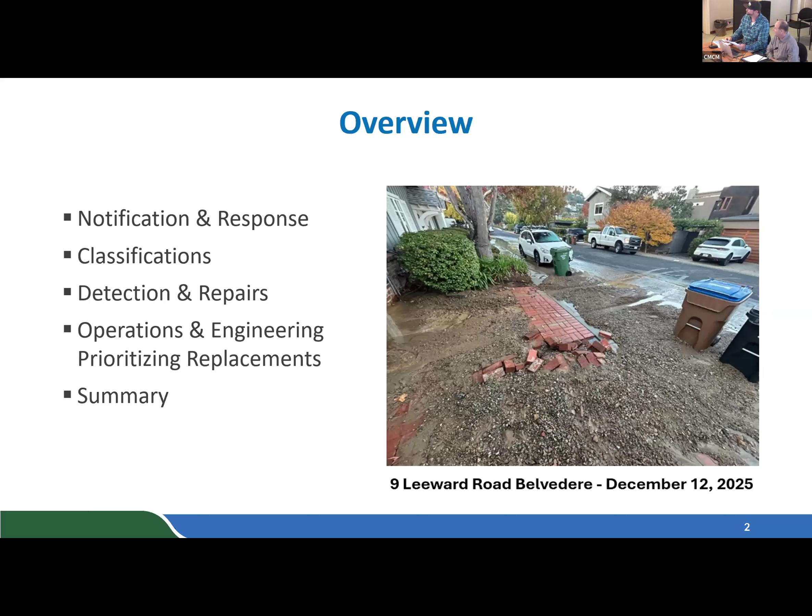At least we didn't get the BMW wiped out with the rocks this time.

So some key considerations for water main breaks: impacts extend beyond repairs and include customer outages, property damage, and environmental risk to aquatic life from discharges. Key points include outage extent and duration — some water main breaks may extend for a long time, affecting customers' water use. Some system impacts could affect district-owned pumps and tanks. For multiple customers, some of the larger jobs, believe it or not, may have a big impact — they may only be 1 or 2 service laterals affected, but there could be hundreds affected depending on where it's at in the system.

Property damage potential includes both residential and business. It could be privately owned property where water gets into a garage and affects storage boxes of personal property. It could also cause flooding in homes, atriums, and entryways. The other key point here is chlorinated discharge impacts to nearby aquatic life.

So, direct discharges. Some of these main breaks, as you see the one on the previous slide from Leeward in Belvedere, there was obviously a significant amount of water that traveled down the street. That can have an immediate impact if there's a nearby waterway.

Is this at that same house? This is not, this is over here on Old Quarry Road. This was a sheared off fire hydrant. Yeah, that's what it looks like.

So, even these can have extensive chlorinated impact if there's a nearby waterway.

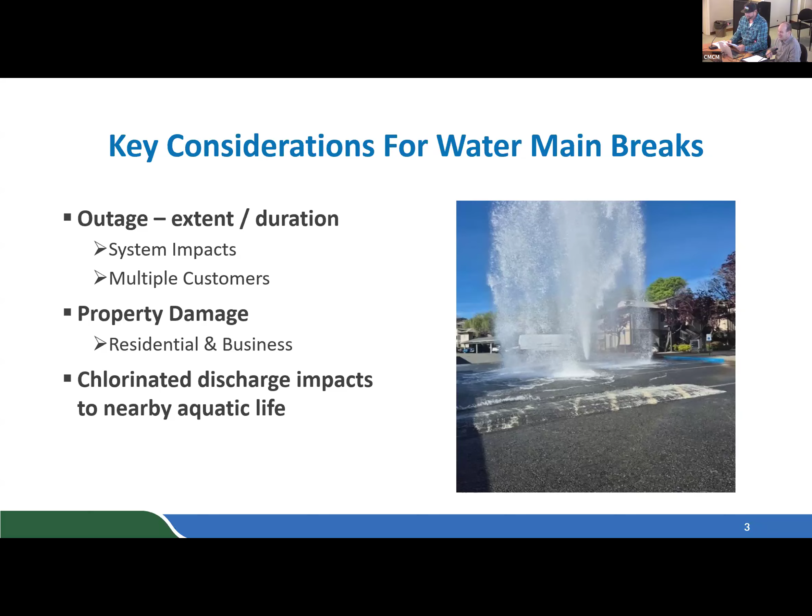So here we have notification and response. You have water main breaks reported by the public, first and foremost. They are our eyes and ears out there, they see stuff day to day. So they're usually our main reporter of water main breaks or street leaks or leaks that they need us to go take a look at.

You also have emergency services, be it the fire department, police department, or other utility companies. You also have SCADA alarms - supervisory control and data acquisition - where we can see rate of change alarms for storage capacities in the tanks. We can also see flow problems such as suction or discharge, input and output from pumps as we're moving water along the system. Usually when we get an alert, we want to get somebody out there in the field to take a look at it.

We do have 24/7 distribution operators working in operations. When a leak is reported or a potential main break is reported, they'll notify one of 5 utility system specialists here at the district, who are 24/7 first responders. This could be during normal business hours, 6:30 to 3, or after hours, middle of the night, weekends, or holidays. The utility system specialists will then go out to the field, report on that location, and report their findings.

It's important to note, and I'll note it again later, that not all leaks that get reported are district leaks. A lot of the time it's consumer leaks, particularly this time of year when we see a lot of broken irrigation as it starts to heat up. From there, the utility system specialist will report their findings and classify the leak to the distribution operator. We'll get into leak classifications later in this presentation and how they're defined and responded to.

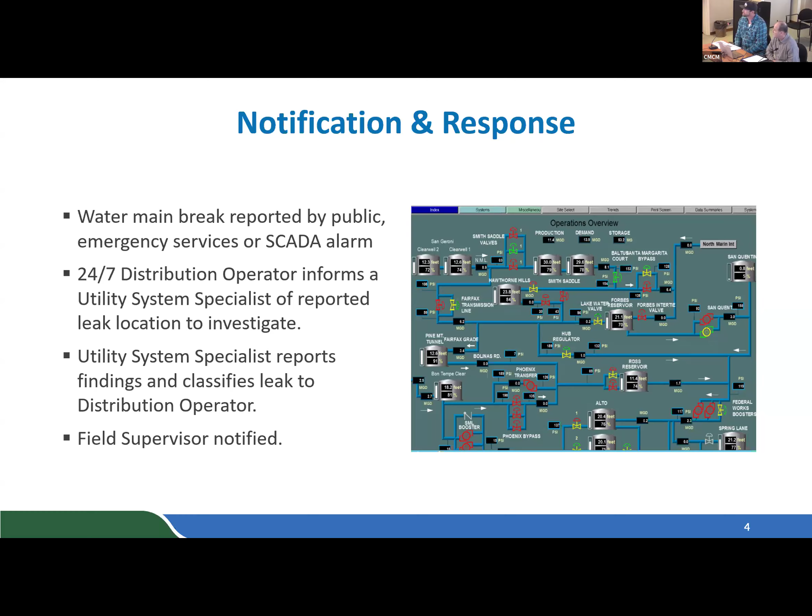So here you kind of see a response chain. We'll get into the first 3 right away. The leak gets reported to the distribution system operator, to the water district. The utility systems specialist responds to the site, and the distribution operator or supervisor is notified of the findings.

Now, if it's a consumer leak and doesn't have anything to do with the district's infrastructure, the communication stops at the distribution operator. They report their findings: we have a leak at this address, it's a consumer leak, I met with the homeowner or business owner and told them of the fact.

If it is a district leak, from there, the supervisor will then get notified of the findings. The job will get scheduled and repairs will be made. The image on the right shows one of 5 utility system specialist vehicles responding to a scene, securing the scene with cones, lights, and their available equipment.

And they all carry dechlor? Yes. I'm really not asking these questions for me - I'm asking for the board so that they kind of understand a little more about what we do.

Yeah, it's important to also note on that previous slide, this slide shows that every reported leak triggers a defined chain of actions that moves efficiently from detection to repair.

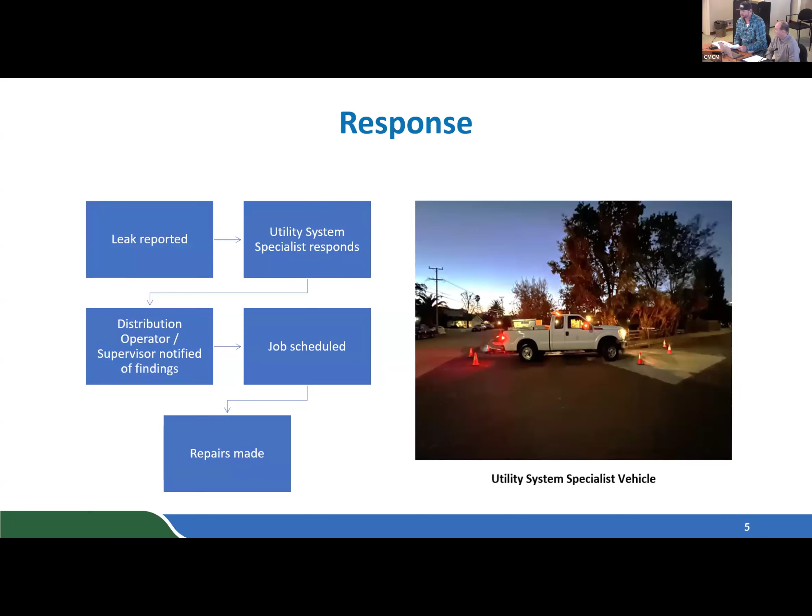This next slide shows utility system specialist and distribution operator response, and the response between the two classifications. What this slide shows is a clear division of responsibilities and communication that is critical to minimize impacts, environmental risks, and liability during water main breaks.

On the left-hand side you'll see the utility system specialist defined roles. They will identify the leak based on the call from the distribution operator, whether it be a class 1, class 2, class 3 leak—we'll get into those classifications later in the presentation—

or whether it be a consumer leak where they need to report their findings. Their job first and foremost is to secure the leak location. If it is a district water main break, we've got to secure the location first from the public and from other vehicle traffic, and make the scene safe. That's first and foremost, and ensure it remains safe.

We'll also put out best management practices, BMPs as we call them. That's a silt mitigation and dechlorination process where we try to dechlorinate the water and mitigate the amount of silt that could get into a waterway, like a storm drain. We'll get into those again later on—there's a particular slide that displays that.

Documentation, photos, and written notes. We all have cell phones—utility system specialists have their cell phones, and everybody takes pictures nowadays. So we take pictures upon reporting to the scene, during the duration of the work, and of the repairs made. So we have all the documentation we need, along with written notes regarding the progression of the job. All that comes into play when the work order gets created by the supervisor for documentation purposes and potential claims. We'll get into that here in a minute.

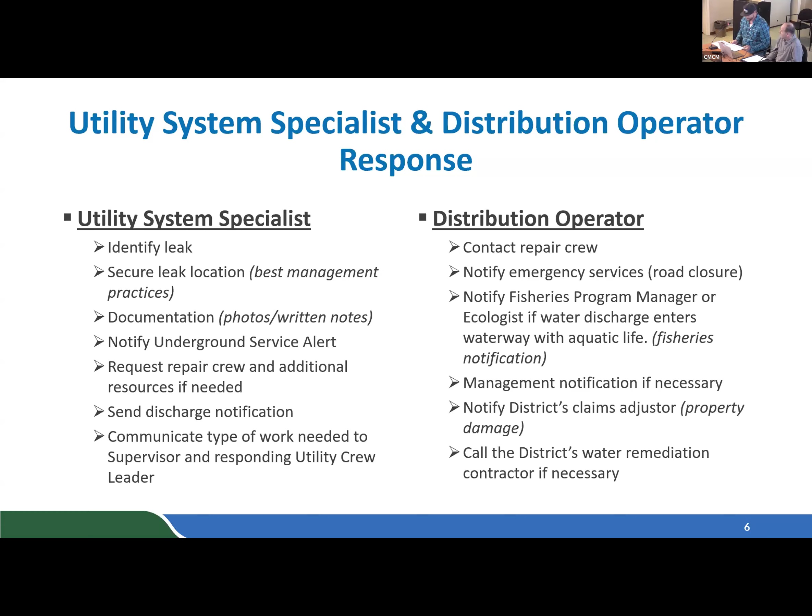This next slide shows the supervisor's response. The supervisor, upon notification, will assign the resources. Again, the resources could include a typical 4-person crew, or additional resources, such as an extra heavy equipment operator, as mentioned before.

They'll create the work order for documentation. This is where all the photos taken by the utility system specialist, by the field supervisor if they show up onto the job site, and the overall progression of job site notes taken by the utility system specialist and utility crew leader for work performed get documented.

The supervisor will make a job site visit. Not always, but pretty frequently, the supervisor will visit either to talk to customers who are upset and want to know what's going on, or to check in with staff and make sure they have the available resources to direct and perform the repair and are set to be successful in that job.

They'll notify the local agency of the leak repair. We'll get into this more with a class 3 water main leak later in this presentation, but some basic points of notifying a local agency include filing an encroachment permit, designing and submitting a traffic plan with a software program the supervisors have access to, known as Invarion, and submitting a site plan. That software lets us pull a map image and attach information blocks to show the exact job site location, traffic control measures, detour signs, and overall information for local jurisdictions to get their approval.

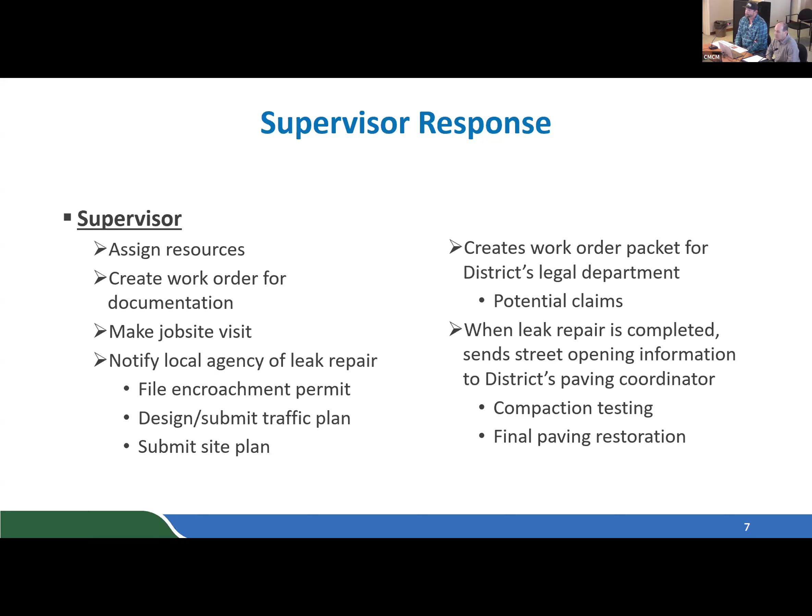Where does the water go when you cover the inlets? It's able to travel through that mat. Depending on the area where you're at through Marin County, if you're next to a waterway or a known creek, you try and track it down the street or towards that waterway to see where it goes.

You might recall that we were fined almost $250,000 by Fish and Wildlife about 15 years ago for illegal take, because we captured the dead fish and put them in the freezer, and then they told us we took illegal take of the fish. So this is serious stuff in terms of the consequences of releasing chlorinated water into freshwater bodies.

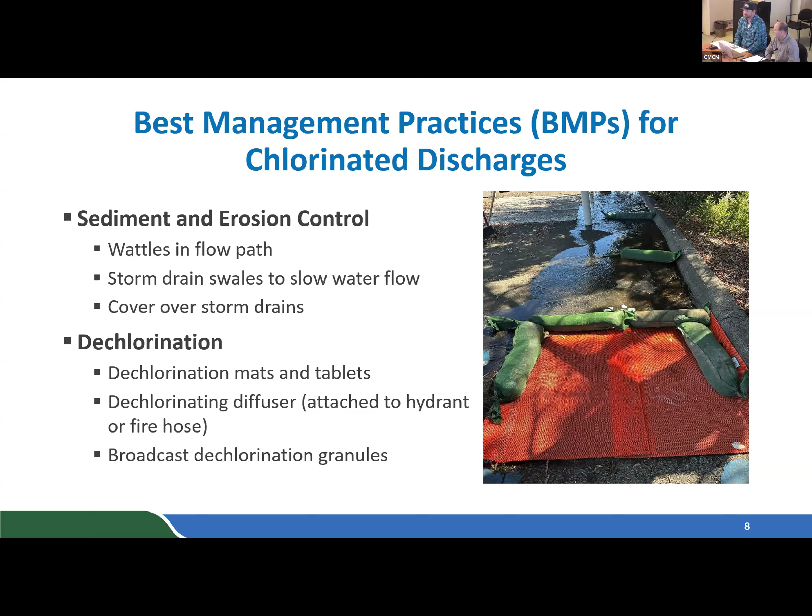We also have small pea gravel sized granules that we can disperse and throw out in the path of the water travel, which dissolve on contact with the water to assist in those dechlorination efforts as well. So we have a couple of different choices we can use.

Class 2 water main leaks are those where service is not impacted due to the leak, but the leak will be managed based on available resources. It's important to mention these class 2 leaks could be repaired the same day, depending on further discussions of potential impacts and what infrastructure is leaking.

Class 3 leaks are very minor, with estimated water loss being low, and will be repaired within a 2 to 3 week period depending on other priorities. It's also important to mention a class 3 leak could be elevated to a class 2 or class 1 to be repaired the same day, depending on potential impacts and infrastructure, but that would involve further discussion with staff.

Was that Belvedere pipeline on the radar? Was it one of the ones to be replaced? In regards to the capital plan, we have that ranking of potential leaks or bad spots, but no, that water main break happened all by itself, unknown cause. Was it the normal thing where it splits along the top? Actually, this one split on the bottom.

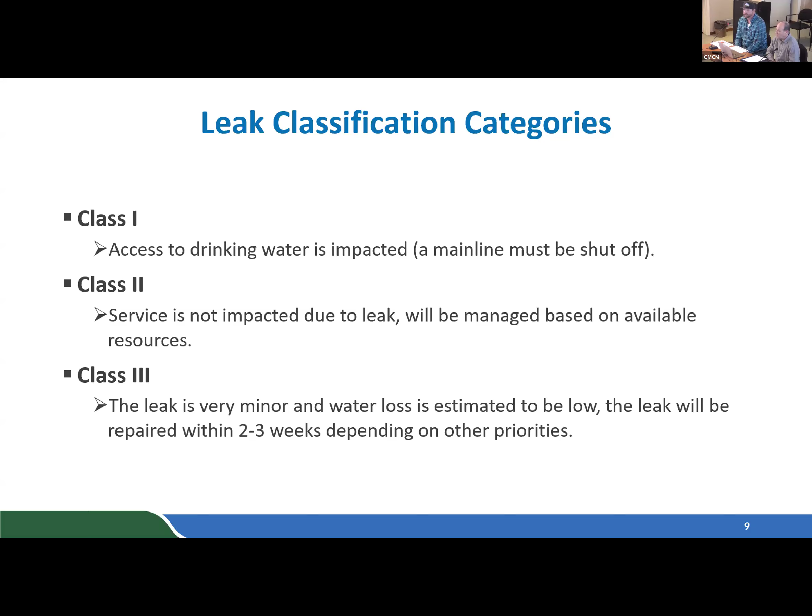Those are our excavators? Yes.

It's important to mention, and this will play into the second class 1 water leak we'll see in the next couple slides, that this water main break happened Monday evening, unreported, and it was the first of 2 that were reported that same evening. There were a total of 18 staff who worked on this water main break through the night into the next day, with the first initial responding staff of 7. That crew was replaced by a staff of 5 at 2 a.m., and then at 6:30 the following day, a crew of 6 came out to relieve them. So in total, 18 staff worked on this throughout the night.

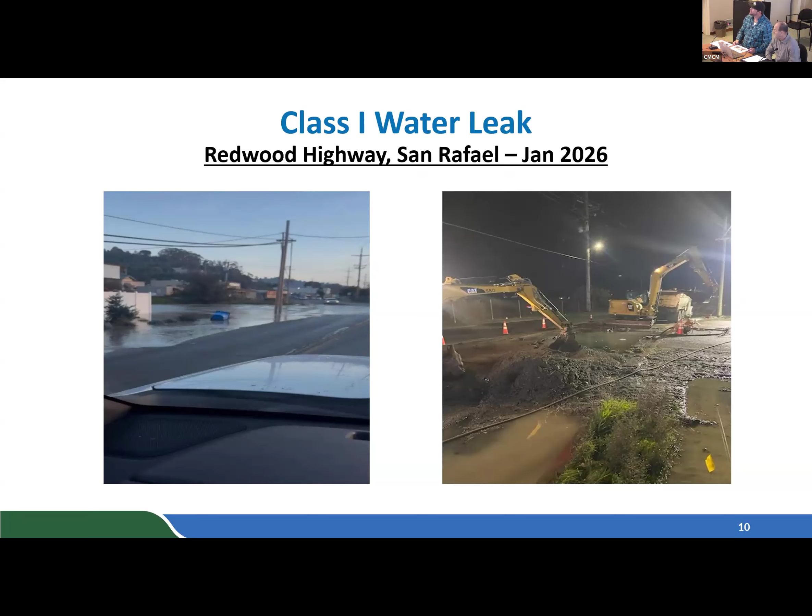Sometimes we see a small section and it travels beyond the bell and spigot into a whole other section of pipe, and we have to make some pretty extensive repairs.

One question this raises for me - when you have these kinds of leaks, is it usually in places you'd expect, like where something hasn't been serviced in a long time, or does it just seem unavoidable, like it could be a brand new pipe? Honestly, I was a utility system specialist here at the district for 8 years, and in my experience, there could be 100 reasons why these water main leaks appear. If we knew where these were going to appear in our pressurized system, we would try to address it. But usually these ones just happen, and it's usually not newer pipes. One last question - you said this was unreported. Is this something the SCADA system would have alarmed about, an 8-inch leak like that?

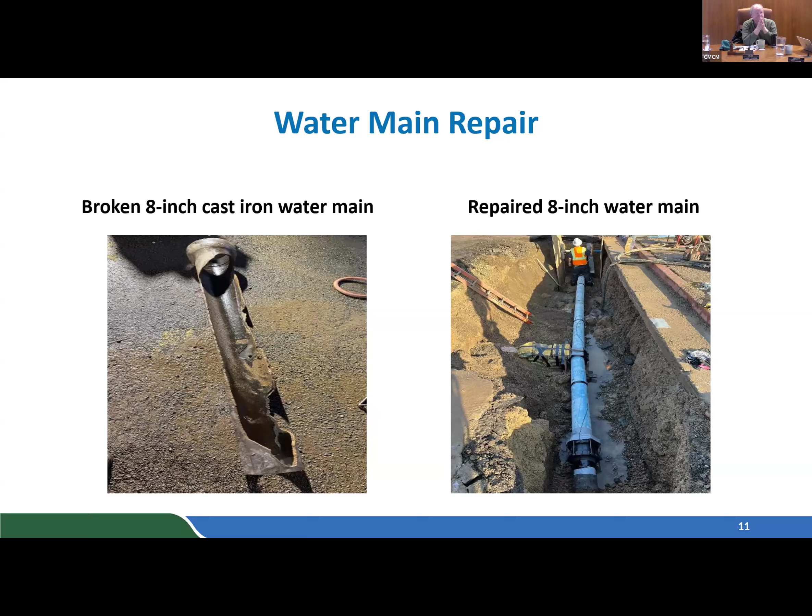For this leak, we were able to get a crew of 5 to respond in the middle of the night, unannounced, to start repairs on this water main and make the excavation and expose what's leaking. That crew was replaced by an additional staff of 4 at 6:30 the next business day. So that initial staff, called unannounced in the middle of the night, worked through the night till the next day to make repairs to this water main.

So just to clarify, Mark, these 2 events you've just walked us through were happening almost simultaneously, within 2 hours of each other. So we had crews for each of these. Yes, and when he's saying unannounced, there's a certain number that are on standby any given day that are sort of planning to be called in. But once those are exhausted, you're kind of making cold calls to see who may be available.

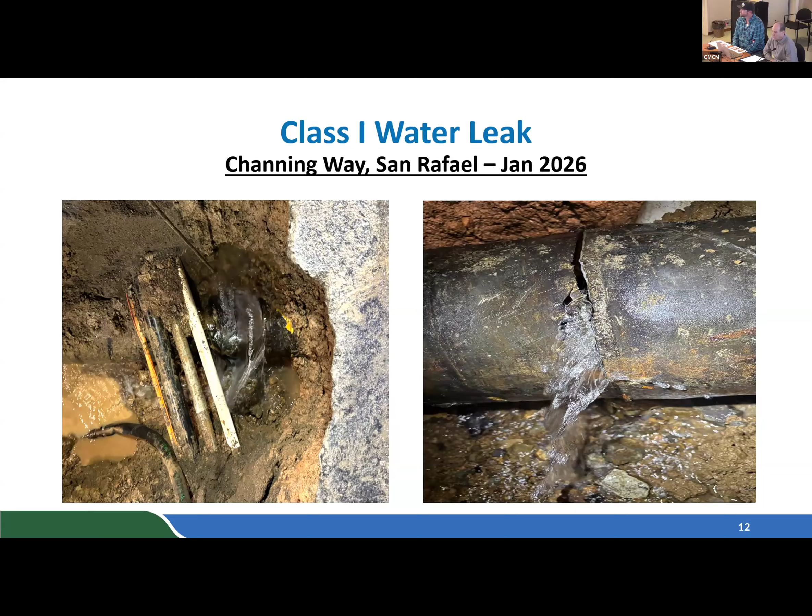As mentioned earlier with the classifications of leaks, depending on what the Class 2 leak is and what pipe is leaking, that develops into further discussions on whether repairs are made that same day or scheduled. This is a pretty popular area for hikers, bikers, and dog walkers throughout Marin County, so we responded to this Class 2 water leak the same day. Within about 2 hours, we had staff out there on site beginning to excavate and find out what infrastructure was leaking.

Any fish kills on that one? No. Quite a bit of water though - quite a bit of water.

So here you see where staff exposed a 24-inch pipeline access hatch - that's what we exposed digging up the leak location. Just below that access hatch, there's a 3 to 4 inch split on the side of the pipe, just below that hatch. That's what we exposed, and that's what was leaking on the side of that pipe.

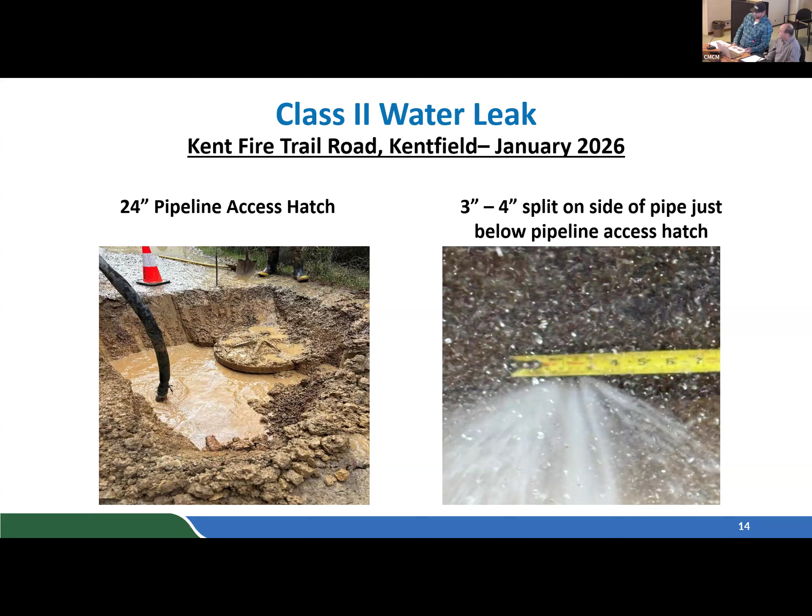What is that hatch for? Inspections - 24-inch, a little tough to get into. A little tough to get into, yeah. I'm not going to get in there.

The image on the left shows, after the planned emergency shutdown and draining process, the small crack in the side of the pipeline just below that access hatch. The image on the right shows the welded patch plate repair performed by the district's welder fabricator. It's important that on this particular repair, we were able to plan what we call an emergency shutdown.

So once we exposed the leak and determined what was leaking, we looked within the system at what it was going to take to shut this water main off.

The distribution system operators, to walk you through some of the process, early filled 12 storage tanks throughout the system. There were 23 water valves utilized during this shutdown. 6 pump stations and 5 regulators throughout the system were affected. There was reduced fire flow to small areas within the system, and confined space issues. We can reroute water through the Ross system, through Federal Works, and to the Alto tanks to supply Southern Marin, but in total there's a lot of individual steps that need to happen.

During the shutdown process, 1 utility system specialist and 1 mechanical and electrical worker - from the time they turned the first valve, it was 13 hours until the pipeline was drained. Upon turn on, 2 utility system specialists and 1 mechanical and electrical worker took 10 hours from the time they started to charge the water main until it was fully turned on. Throughout all of this, the most important fact: no consumers were affected. Everybody had water.

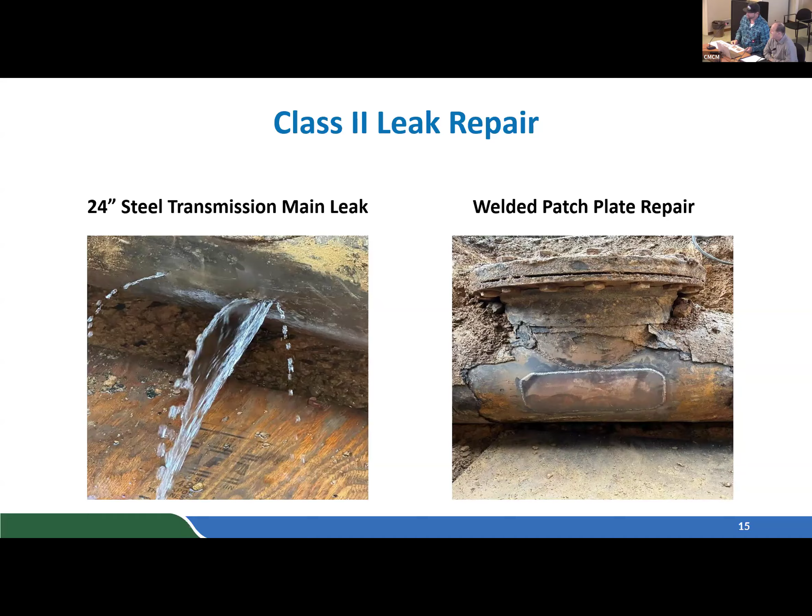So here we have a Class 3 water leak on Larkspur Landing Circle, October 2025. You'll see there's a visible water leak in the roadway. This took a coordinating effort with our water system technicians in our leak detection department to identify and pinpoint the leak's location. We used acoustic listening devices, correlators, and leak loggers to listen on the section of water main, either between a service and a valve or a hydrant and a valve, to encompass the area where we suspect the leak is coming from. That gives us a pinpoint area - a broad range of where that equipment is telling us the leak is, like 10 feet from this valve, or 15 feet from this fire hydrant.

We took it a step further - you can see the image on the left. If you turn your head to the side, you'll see the words 'test holes.' That's a common method we use to actively, visibly pinpoint water leaks. The circle dot in the middle indicates where our acoustic listening equipment places the leak location. We'll go out there and drill anywhere from 1 inch to 2.5 inch diameter holes through the AC, put steel listening rods down into the ground to come in contact with the water main, and listen with our own ear for the water leak. We were able to accurately pinpoint this leak with those efforts, and you can see what we exposed in the ground - the 16-inch water main, and in the picture on the right, multiple leaks attached to it.

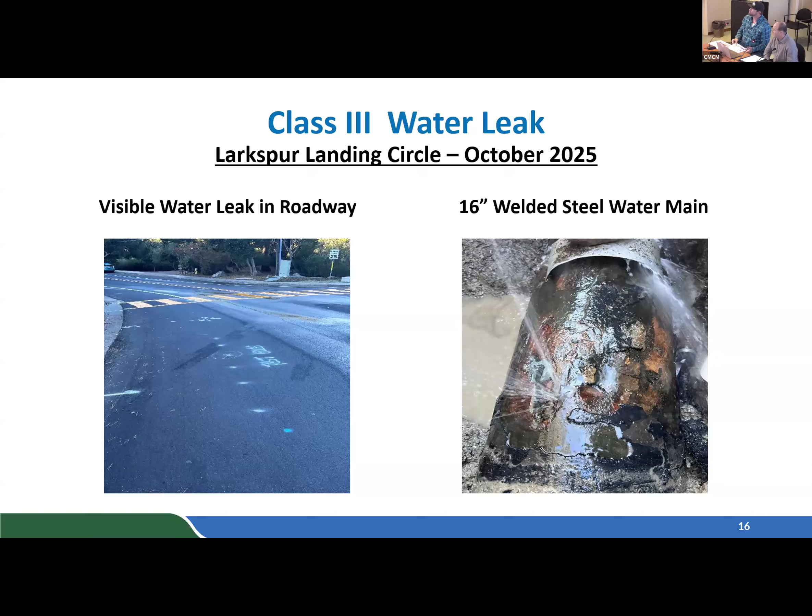So here's the continued repair efforts on this Class 3 leak on this 16-inch welded steel water main. You'll see a staff member inside of the excavation using a newly purchased tool that we purchased back September of 2025, known as the Wachs Diamond Wire Rope Cutting Saw. What that is, it's got a diamond rope attached in the saw. It clamps over the top of the pipe and can cut pipe ranges from 4-inch to 16-inch. So shortly after we purchased this piece of equipment, we get to use it at its max effort.

It provides definitely a safe, reliable cut for a section of pipe, when you consider other methods that other utility companies, or that we've used here at the district, other pieces of equipment we've used to cut pipe. There's always the potential for some danger. So it straddles over the top of the pipe, and the rope goes over the top of the pipe this way, and it cuts down.

The staff member there you see cutting the pipe, he has a hand crank that he's driving that wire rope saw through the top of the pipe. So it's kind of like a chainsaw with a diamond rope. Yes, like a guillotine saw. And this is shoring on the right. That's a good example.

To touch on what General Manager Bennett touched on just a little bit ago regarding the shoring and the safety of staff, the overall excavation on this job was 5 feet 4 inches into the ground to the top of that pipe. When you consider repairs that were needed, we needed access to the bottom end of that pipe, so that hole was 7 feet plus in depth. So what we did was we utilized the district's hydraulic shoring jacks.

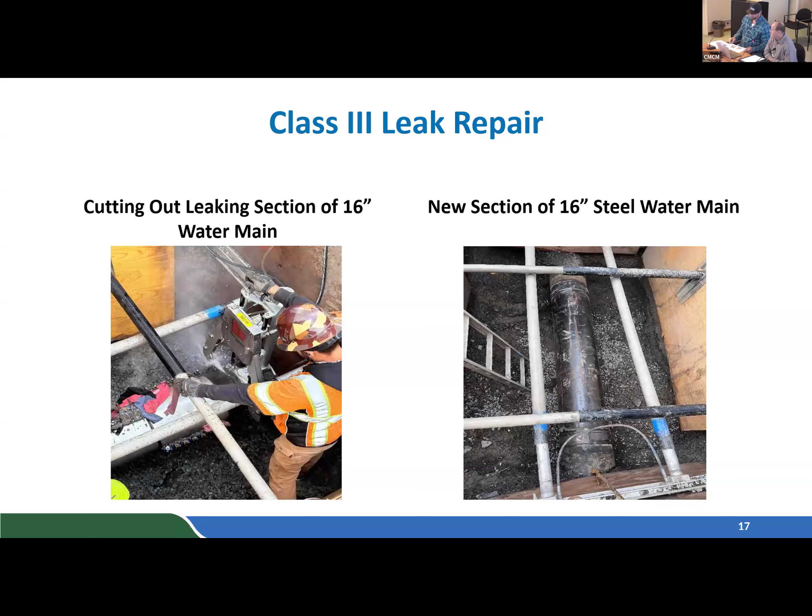So here's another example of a class 3 water main leak in the Terra Linda area of San Rafael that I mentioned earlier in this presentation. Leak repair coordination and permit process.

Here we have a detected class 3 water main leak at Las Gallinas Avenue and Northgate Drive in San Rafael. We know that it's an 8-inch cast iron water main running through the 4-way intersection. It's also important to mention that just east of this photograph, maybe 2 blocks down the road, is Highway 101, so it's a pretty busy area. This leak was minor and the water loss was estimated to be low.

Again, to Director Russell's point, you can see the water showing up on both sides of that intersection. But if you look at the photograph, I drew a blue dotted line, that's the actual location of our 8-inch water main. So you can see that the water doesn't always necessarily show up where you think the main is. There was definitely some potential impact from this, being in the busy 4-way intersection next to Highway 101, and there was significant coordination between the city of San Rafael that we'll get into in the next couple slides.

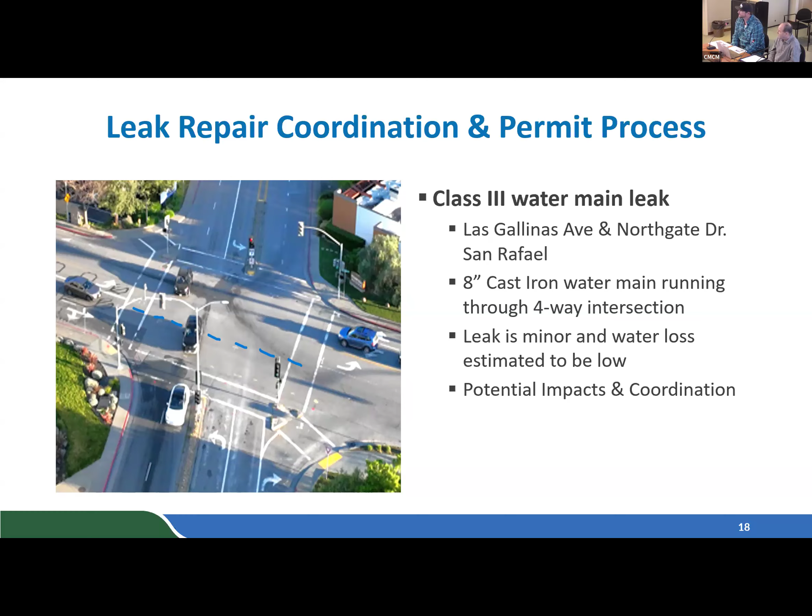This slide is going to show some work that had to be submitted to the city of San Rafael to perform this work. So here we have an encroachment permit, which is filled out by the field supervisors and submitted to the city of San Rafael. You can do this because it's a class 3, not if it's class 1, you just go, right? Class 1 we go, but we still do follow up and send all the required forms and paperwork to the jurisdiction. So we're going to go through several different forms that had to be submitted through the city of San Rafael to be able to perform this minor leak repair known as a class 3. First and foremost, we have the encroachment permit.

Next, we have a site map. This site map is generated from our GIS software program. We take a still image in the Google Live Map view of the area to be worked on, and through the Invarion software program, we're able to attach boxes that explain what it is that we need to work on. They can see exactly where the site is located, and they can see the work site area.

It's also important to mention, not only for the visible water location showing up for the leak, but also you'll see the purple line - that's a reclaimed water line. So we had some complexities in determining what exactly was leaking in the middle of this intersection.

So we got our leak detection department involved. We did a planned shutdown, a quick planned shutdown that involved 2 valves and 1 service that fed a gas station. We wanted to determine whether or not it was on the reclaim line or on the potable line. So we shut down the 8-inch cast iron potable line first and foremost, and the water flow stopped 10, 15 minutes after the shutdown was done. So we confirmed which pipeline it was on.

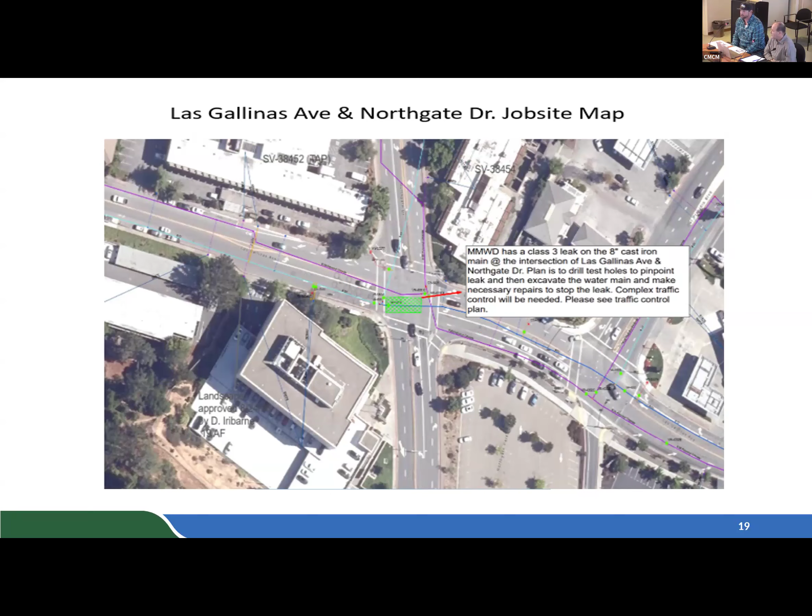Upon designing this traffic control plan, once it's submitted to the city of San Rafael, we need their approval. They may want us to change something, they may want to add a sign, or they may want us to submit another form.

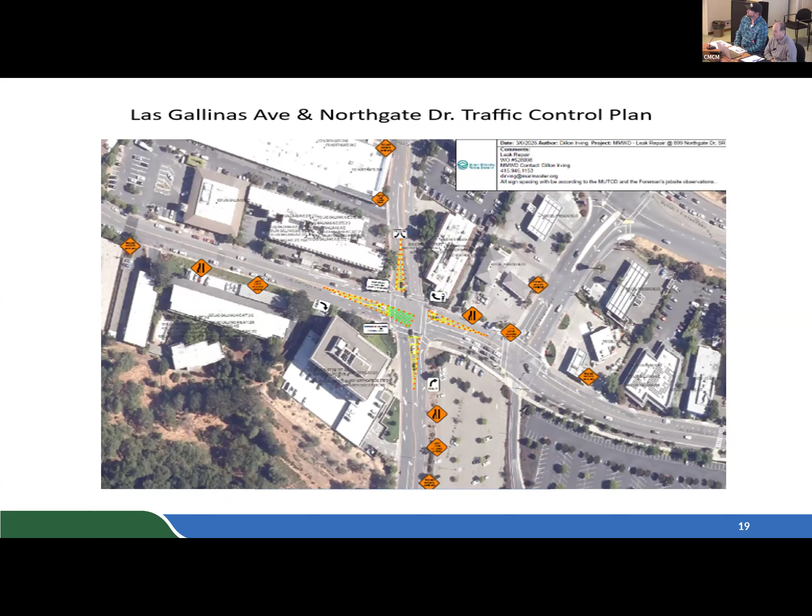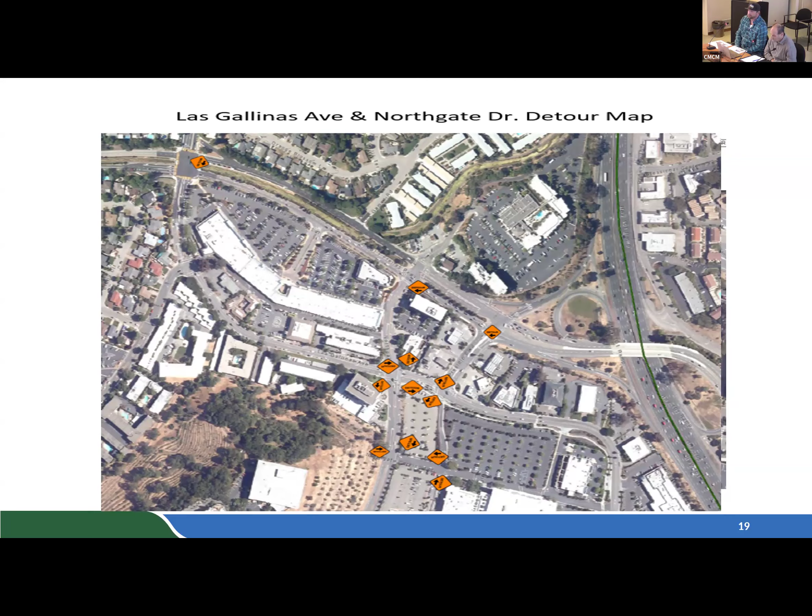Mark, how long did this fix take? We were out there from 9 in the morning till 3 o'clock that day. Wow, yeah.

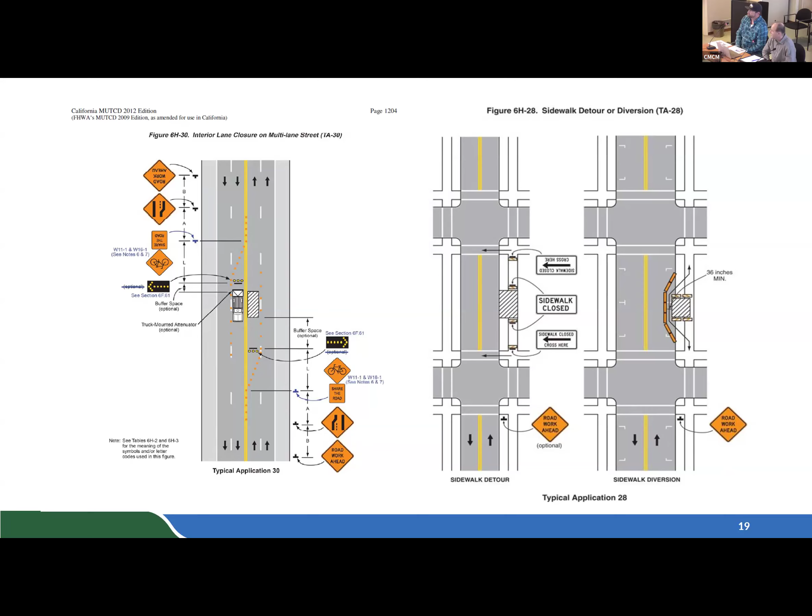Pretty fast. Yeah, and the city of San Rafael and the coordinating efforts gave us that timeline. They said you cannot be in the middle of that intersection prior to 9 a.m., and you need to be out of there by 3 p.m.

So the importance of taking the extra time, performing the test shutdown, using our acoustic leak detection equipment to pinpoint that leak. We got a limited time to get out in the middle of this busy intersection and perform the work, because after 3 o'clock that intersection is going to get very busy. So using all of our resources, all of our tools and available equipment, and being safe at the same time—again, safety comes up working in the middle of that intersection.

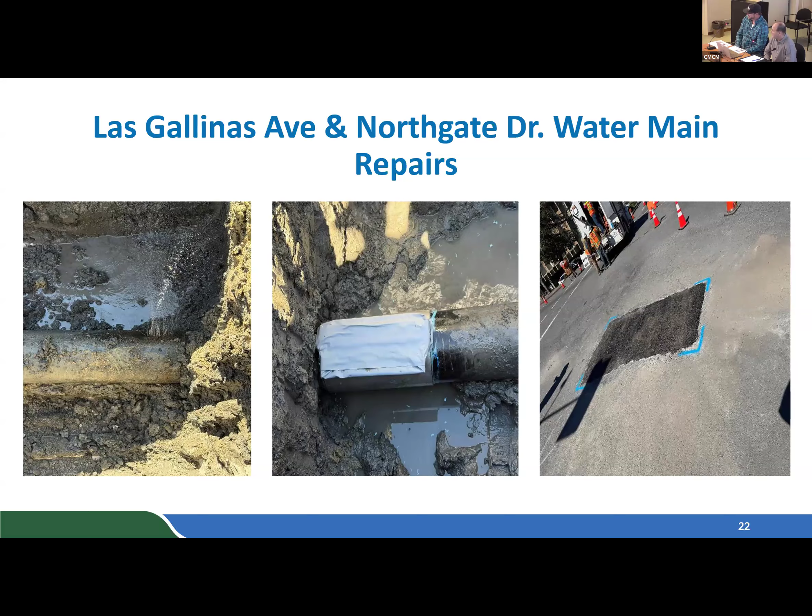So here you'll see the three images of that leak. The leak on the 8-inch cast iron water pipe, you'll see in the image on the left—that's what we exposed as leaking. The image in the middle, we have an 8-inch by 20-inch full circle leak clamp that we typically utilize to wrap up these leaks and fix them. And then the image on the right, through the pinpointing efforts and the leak location, is a 5-foot by 10-foot patch when we left that intersection.

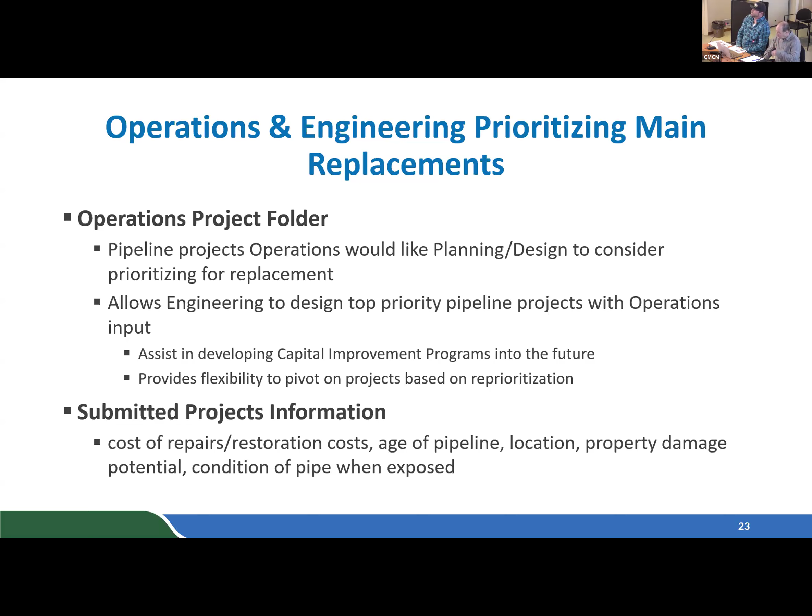So the operations and engineering prioritizing main replacements—last April 2025, I believe it was April 29th, 2025, operations and engineering developed a project folder. This folder is pipeline projects operations would like planning and design to consider prioritizing for replacement. It allows engineering to design top priority pipeline projects with operations input, and it assists in developing capital improvement programs in the future, providing flexibility to pivot on projects based on reprioritization. The submitted project information included in those folders is the cost of repair and restoration costs, the age of the pipeline, the location, property damage potential, and condition of pipe when it is exposed.

The operations projects folder contains project priority and estimated fiscal year information. Once projects are submitted into this folder through discussions with engineering, planning, and the superintendent, we take a look at those operations projects and come up with a game plan for fiscal year estimated replacement dates.

Within those projects is the name and location of the potential project, existing pipe size, type and length of pipe, the number of service laterals and leaks, replacement pipe size, estimated budget costs, and any additional notes such as public right-of-way easements or existing projects.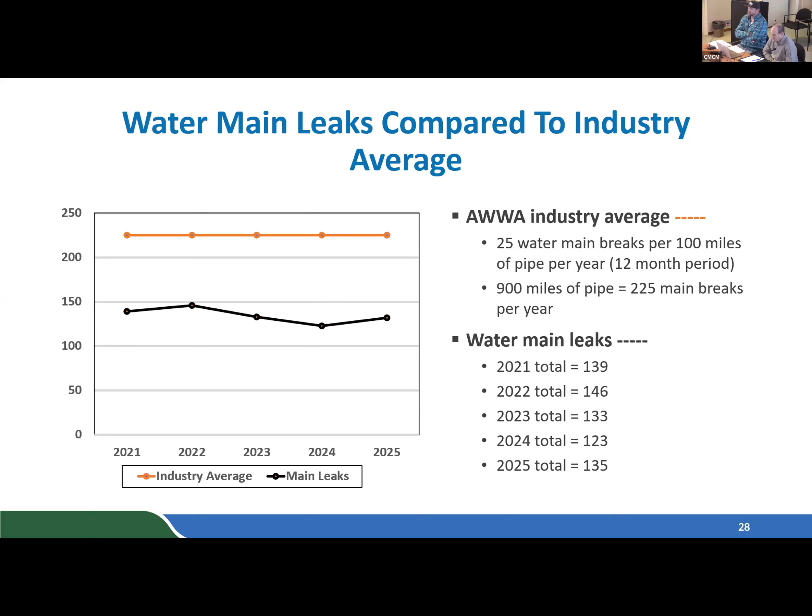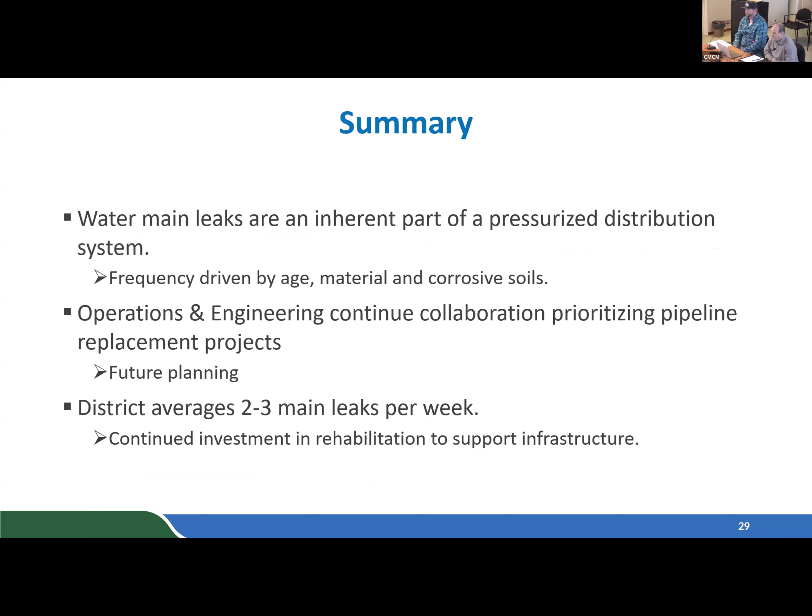Mark, Darren, thanks a lot. This is an amazing update on an area of the district that I don't think gets that much attention.

We have goals for pipeline replacement. I think we're trying to get up to over 8 miles a year now, maybe pushing closer to 10, and we've made some effort to prioritize together with planning areas for more attention with respect to replacement.

As we continue with our replacement cycle for pipelines and new materials are used, would we expect at some point that leak frequency will decline based on the renovation of our distribution system? I mean, that could be expected.

Absolutely. I think the term 'at some point' is operative in the question, because really what we have now is hundreds of miles of cast iron pipe aging in a way that's hard to predict, and failing.

So we are going to have to get through that hump, which is going to take years, if not decades. And as you get there, the older stuff starts to get older, right? There's a continuum when we think about our infrastructure. It's hard to imagine the CIP ever going down. It's just the nature of this infrastructure-intensive industry, the nature of Marin with disproportionate industry and geography, the hills, the pump stations, all that. It's a difficult issue for the public to appreciate, the ongoing nature of these investments. It's rough, but I think we're at a good spot in terms of slowly bending the curve. That's really the goal, so we aren't behind the game. We're at least catching it and maybe getting ahead of it.